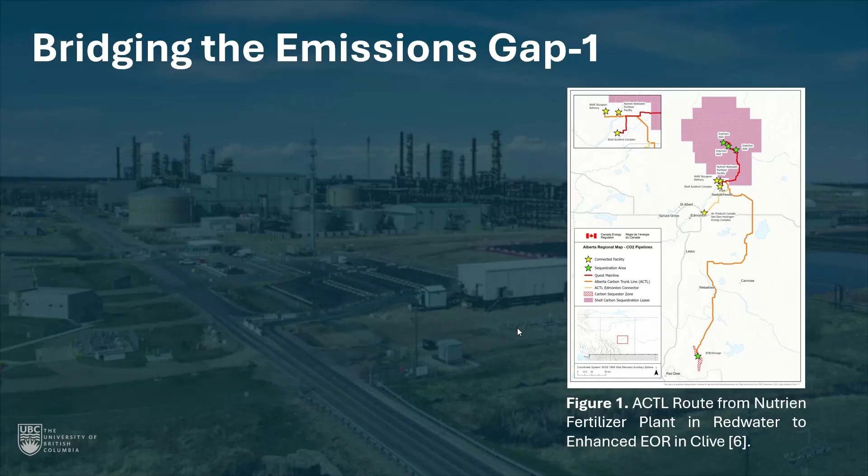Now, looking at the current landscape, we're not starting from scratch. In fact, Alberta is a global leader in this, starting with the Alberta Carbon Trunk Line, which is the world's largest CCS project, which basically captures CO2 from the Northwest Redwater Partnership Refinery and the Nutrien fertilizer plant in Redwater and transports that CO2 to mature injection wells in Clive.

This is a 240-kilometer pipeline transporting 14.6 megatons of CO2. This roughly translates to 2.6 million cars being taken away from the road. And so there's a huge offsetting capability of this plan. But the total project capital was $1.2 billion.

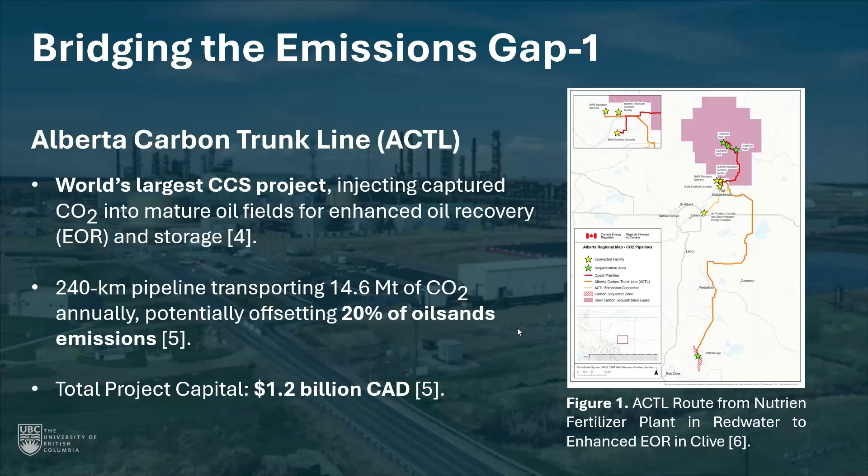Another major project underway is the Pathways Alliance project. This is a joint venture between Suncor, Cenovus, Canadian Natural, Imperial, MEG, and ConocoPhillips. Essentially, the project proposes a 400-kilometer main line with a capacity for 2030 of 10 to 12 megatons per year, eventually scaling it up to 40 megatons per year by 2050. So this would link 13 and eventually up to 20 facilities to underground injection sites.

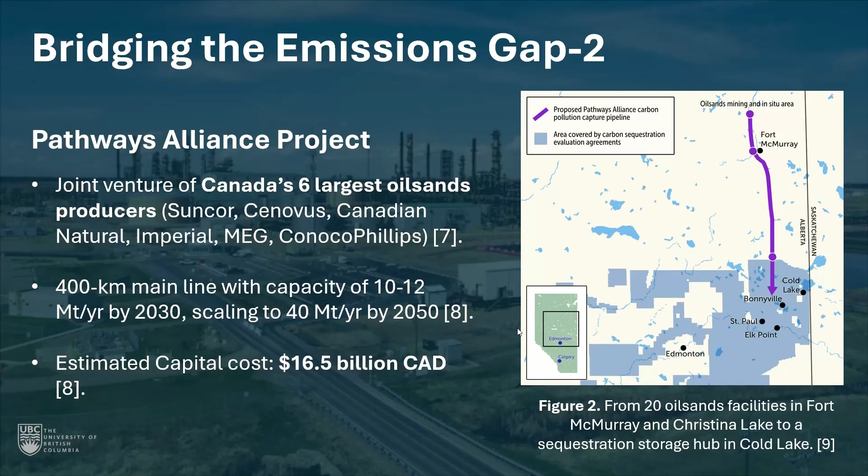And again, looking at the exorbitant capital cost of $16.5 billion. So as we can see, we are faced with an immense capital hurdle. And the question is, can we build our way to 2030 in time to meet our rising global emissions reduction plan? How can we achieve immediate decarbonization milestones while drastically lowering those capital barriers?

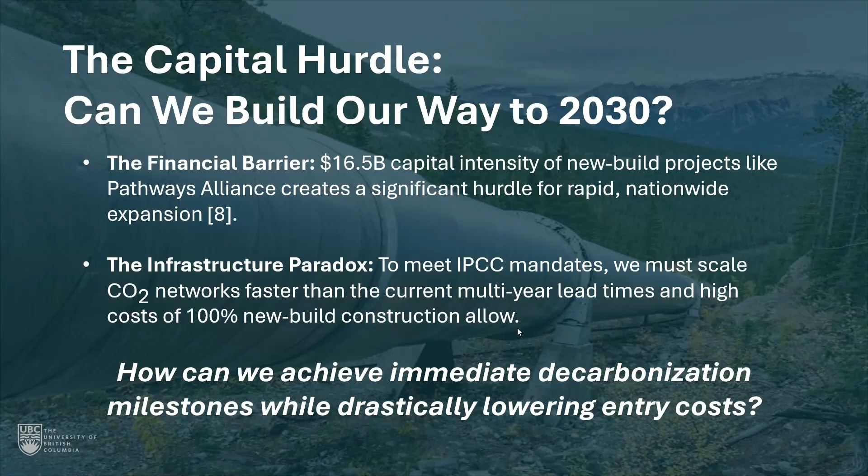So this brings me to the core part of the research, which is: is there a case for repurposing existing assets, oil and gas or natural gas pipelines, whether they're vintage or installed in the early 2000s, let's say.

So we do have examples of pipes that have been repurposed with significant cost reduction, starting with the West Glenville project in the US, which converted a 50-mile, 16-inch natural gas pipe. This pipe was originally installed between the 1950s and 1960s, for $5.2 million. So we see a significant $35 million reduction compared to new build estimates.

Secondly, there's the OCAP pipeline in the Netherlands, which repurposed a 51-mile oil pipeline. This was originally installed in the 1960s to deliver 3 megatons of CO2 annually.

And finally, the number 10 feeder in the UK. This pipe specifically was installed in the 1970s, and it's part of a larger project of a 174-mile conversion. So again, significant cost reduction, roughly half of a dedicated new line.

And as I was doing further digging, a study was conducted by DNV where they found that there's a significant capacity for repurposing pipe. Over 58,000 kilometers of European pipelines have been confirmed for these repurposing projects. And that is equated to 53 to 82% of a cost reduction.

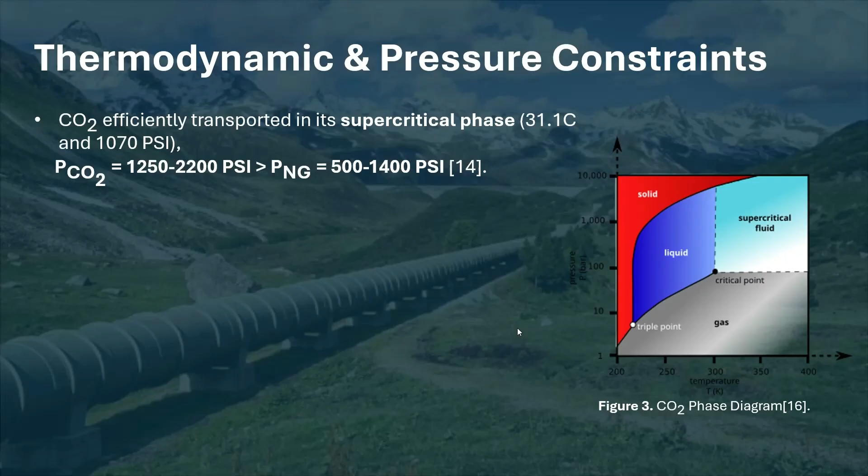And so this occurs at 31 degrees and around 1000 psi. And so the safe operating measure for supercritical CO2 is between 1250 and 2200 psi. Now we can see that's significantly larger than what many of these vintage pipes are rated for, which is around 500 to 1400 psi.

And so this can be quite significant in terms of some of the integrity threats to be seen: significant frictional losses from two-phase flow, lower throughput, as well as integrity issues such as rupture or cracking if specifically the internal pressure of the pipe exceeds the ultimate tensile strength of the steel. Then we start to see a lot of material-related issues.

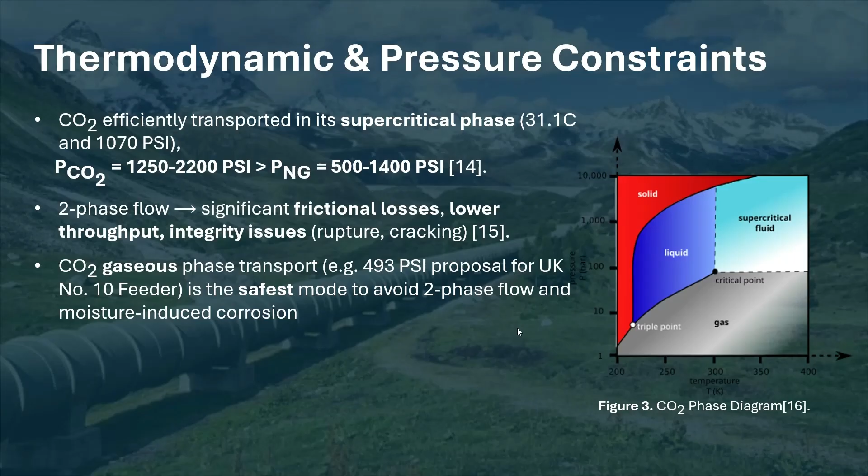From some of the examples I showed before, CO2 is generally transported in the gaseous phase, which is meant to be the safest route in order to avoid two-phase flow, where we can operate these lines within the design limit of these pipes and also avoid some of those integrity issues that I mentioned. So repurposing seems to be more plausible for short distance and modest quantity transport.

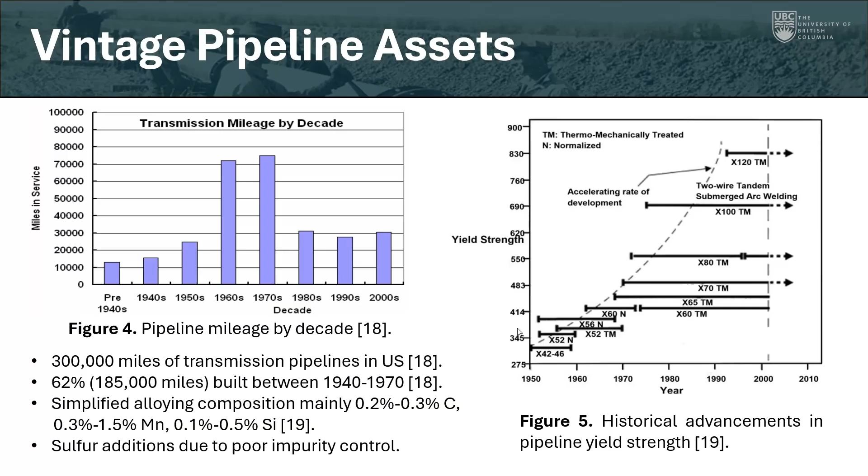While we looked at the thermodynamic constraints, we're also limited by the material constraints, specifically composition and manufacturing, where we see simplified chemical composition, so typically a higher carbon content, as well as low control over sulfur content. At that time, between the early 1950s, we wouldn't have seen as much control on desulfurization practices as we do see today.

Just commenting on some of the metallurgical concerns we have. One, of course, is as the pipe ages over time due to temperature and environmental fluctuations, we can see processes like solute diffusion, precipitation, or grain boundary decohesion. And this can express itself as precipitation in terms of carbides or manganese sulfide inclusion present, which can act as either stress concentrators or trap sites for hydrogen accumulation.

Also, as I mentioned, low control over impurities like sulfur and phosphorus, again from scrap variability at the time, contamination, and low tramp element removal. And as I mentioned just now, high sulfur content can result in manganese sulfide inclusion.

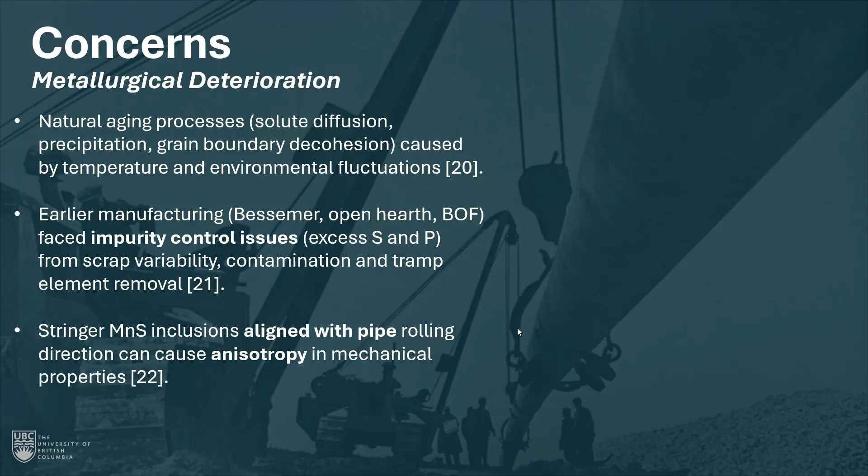These are essentially more ductile compared to the base steel. So during pipe rolling, these sulfide inclusions can align itself with the rolling direction. And then this can cause anisotropy in mechanical properties like tensile strength, ductility, and fracture toughness.

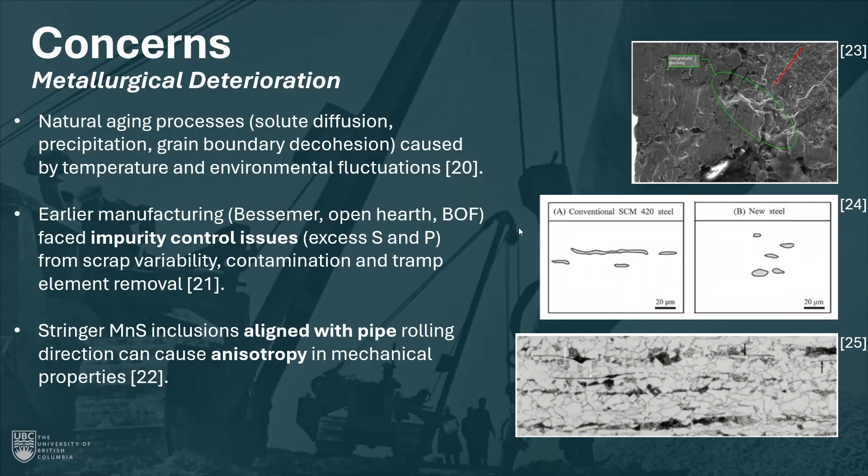So these are just some images showing specifically - the middle image, we can see the banded or elongated stringer sulfide inclusions compared to new steel where they add calcium, which helps essentially - I'm not too familiar with the process, but it essentially breaks up those sulfide inclusions into globular smaller size, which are then more dispersed within the lattice, within the steel lattice.

And today I also want to focus on a concern of hydrogen absorption, so leading to hydrogen embrittlement, cracking, or blistering issues. So when we're looking at repurposing vintage assets, we are also interested in the cumulative history - what has accumulated over the lifetime of that pipe.

And typically a lot of these lines were serviced for sour and sweet natural gas transport. What those two words refer to is the concentration level of hydrogen sulfide. And so if for whatever reason these lines had poor dehydration, we would see that hydrogen sulfide dissociates in a brine environment and forms sulfurous species as well as hydrogen protons.

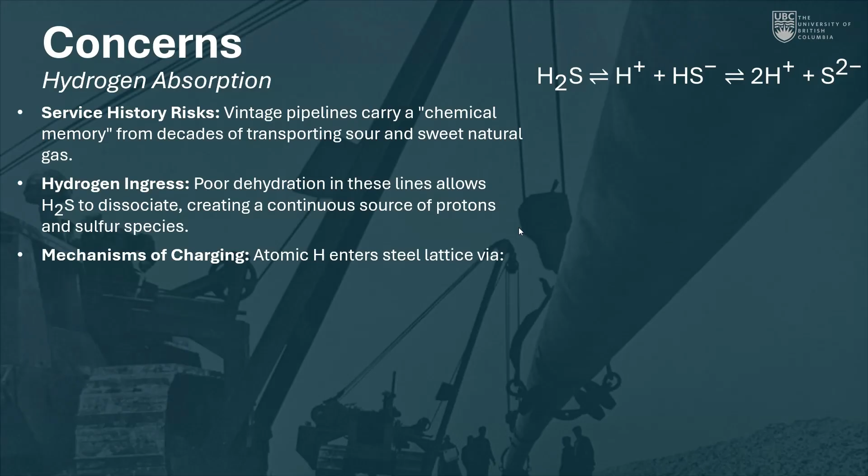And so the mechanism for how hydrogen absorbs into steel occurs from two areas. One is internal corrosion. So now let's say we have an aqueous environment within our pipe. We have our anodic oxidation reaction of steel oxidation.

And then to support that reaction for charge balance, we have the cathodic reaction of hydrogen evolution. So we can see that protons accept an electron to form hydrogen gas. And where do these protons come from? Well, as I mentioned, if we're having hydrogen sulfide dissociation, which also generates protons, then this becomes the source for the cathodic reaction, which then also drives corrosion within that pipe.

And then, of course, also cathodic protection is an issue. So, of course, if the intention is to protect our pipe, if we apply negative potential or negative current, if there's areas or pockets of moisture within that pipe, during cathodic protection, we're also essentially driving that cathodic reaction - we're driving hydrogen evolution. And so we might also see further generation of hydrogen atoms within the steel.

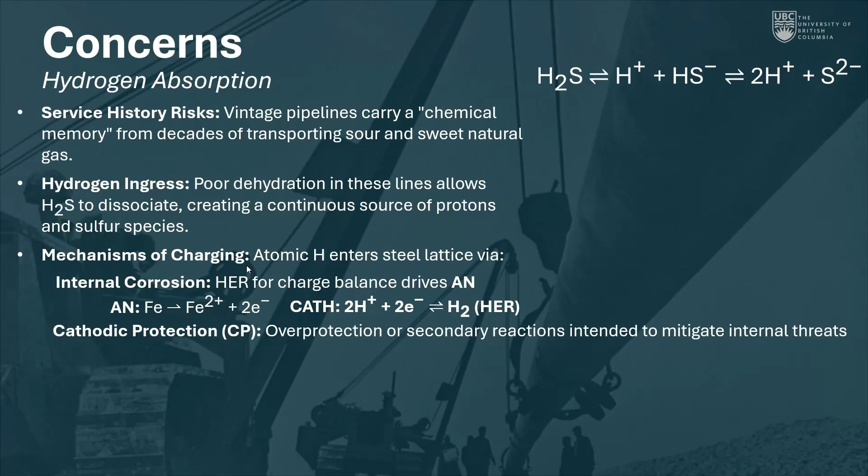And what does that look like? So essentially, if we look at the cathodic reaction, before hydrogen gas is formed, H2, we have single atomic hydrogen atoms - just single H's essentially being adsorbed on the steel surface. And when two of them combine, they form hydrogen gas.

But just before hydrogen gas is formed, those single H atoms can diffuse through the steel lattice. And specifically, they can accumulate at defects, which over time can build up its own partial pressure within that steel. And if that exceeds the steel's tensile strength, we may see blistering or hydrogen-induced cracking propagate within the steel.

And so I did want to just briefly mention that there are two trap sites where hydrogen can accumulate, those being reversible and irreversible traps. So reversible traps refer to fast diffusion pathways like grain boundaries, dislocations, or lattice vacancies, and they have a much lower trap binding energy compared to irreversible traps - where, if you think of a highway and you have cars and then there's a sudden crash on that highway, then you start to have a much slower flow of traffic. And that's exactly what irreversible traps are.

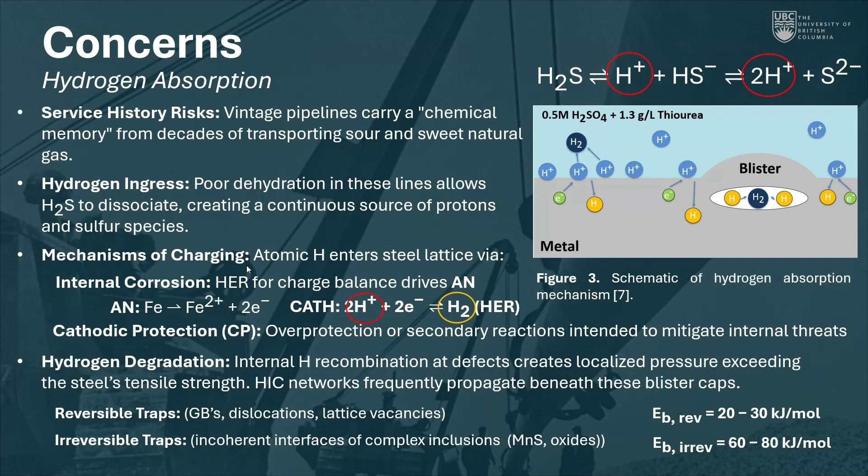They basically act as a sink for hydrogen accumulation within incoherent interfaces, and we typically see these around manganese sulfide inclusions as well as complex oxides. So again, as I alluded previously, manganese sulfide inclusions can be a deep trap site for hydrogen accumulation.

Now that I've looked at the market value of these aging assets as well as the metallurgical concerns, this brings me to my research, where I worked on a case study of a decommissioned 1950s natural gas pipeline. I have three objectives: one was first doing a metallurgical characterization, where we looked at the microstructure and mechanical properties of the vintage pipe compared to modern standards. Then we also looked at the effect of hydrogen absorption.

Let's say this pipe was exposed to a sour gas, and then we would want to see, based on the microstructure we previously assessed, how that hydrogen accumulates in those inclusion sites. Then when exposed to a new CO2 rich environment, during that transition from old to new environment, how does this hydrogen surface damage behave or accelerate corrosion of steel? Finally, I have some images on both pre and post corrosion blister attack.

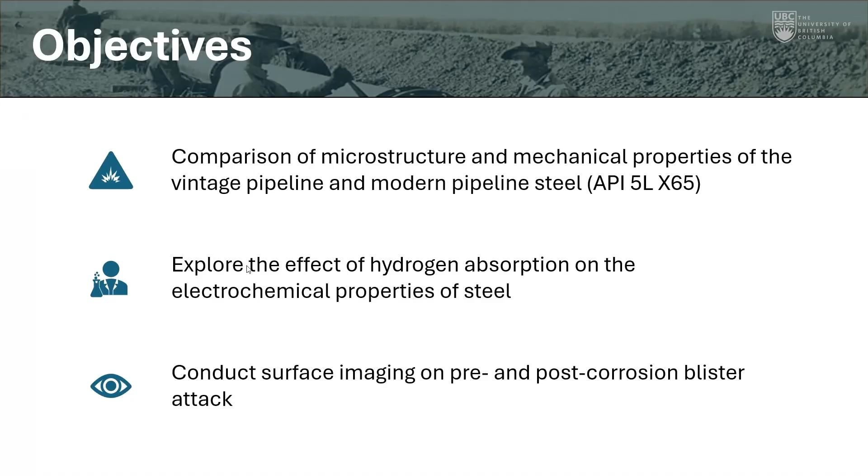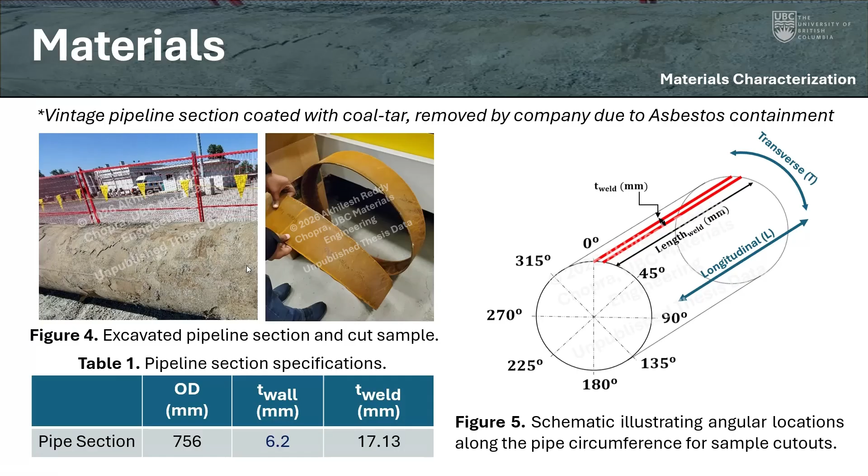So these were a few images of the pipe that we received from a company that I cannot name. We extracted tensile dog bone samples and coupons for the test from various locations along the circumference of the pipe, with 0 degrees referring to the weld line and 180 referring to furthest from the weld. We also extracted samples along the weld line as well as transverse to the weld line to assess any potential anisotropy.

I want to mention that when we first received the steel, we were operating in the dark. We didn't know the service history, we didn't know the chemical composition. So I had to perform something called spark optical emission spectroscopy, OES, where we can essentially obtain the chemical elements of both pipes.

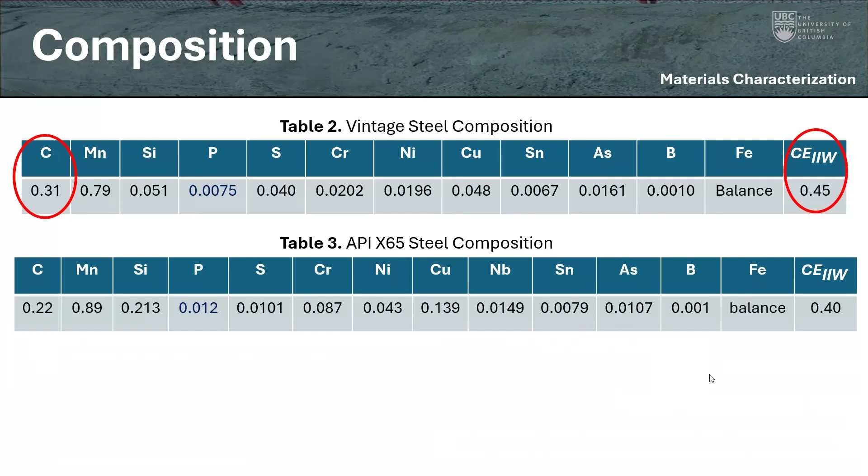I also want to comment on the high sulfur content. In the vintage steel, it's 0.04 compared to 0.01. This exceeds the typical maximum limit of 0.015 weight percent, seen in API 5L for X42 and X80 line pipe steels. This can also imply a dirty steel prone to a high density of manganese sulfide inclusions.

In this image, we can see the microstructure of both image A, the X65 steel, and image B, our vintage steel. Note in image A we see a relatively uniform distribution of polygonal ferrite, also with some areas showing pearlitic phases, bainite, as well as some needle-like or side-plate ferrite pearlite, also known as Widmanstätten ferrite. This can increase the strength of our steel, but it has to be well distributed, which we can kind of see from the morphology of image A.

Versus in image B, for the vintage steel, we do see both coarse and fine grains of ferrite. In the pearlitic depleted regions, we have a greater accumulation of coarse-grained ferrite, and in the pearlitic rich regions, basically the areas that show more black color and contrast, the ferrites are finer.

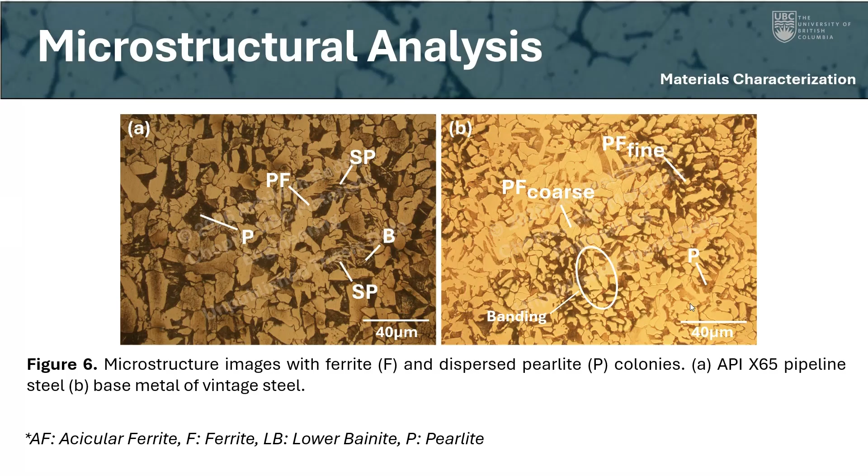So from these images, I tested the yield strength, failure strength, and percentage elongation of our steel dog bone samples for vintage and X65. On the x-axis, you'll notice the various locations along the circumference of the pipe, and then the data points. The red refers to transverse or perpendicular to the weld line, and the black data points refer to along the weld line, or parallel to the weld line.

So what we can clearly see right off the bat is anisotropy, right? Generally, we would want to have similar properties between both the longitudinal and transverse dog bones, but we can see from the yield strength that those are deviating in opposite directions. Also, the values are differentiated along the circumference of the pipe.

I specifically want to comment on the failure stress and percentage elongation. Under loading along the longitudinal direction parallel to the weld, we can see deformation proceeds along the orientation, like we can expect or hypothesize that deformation existed along the inclusion orientation. So if those inclusions, as I mentioned, were elongated and rolled in that same direction, then we would expect to see higher ductility versus transverse to the direction.

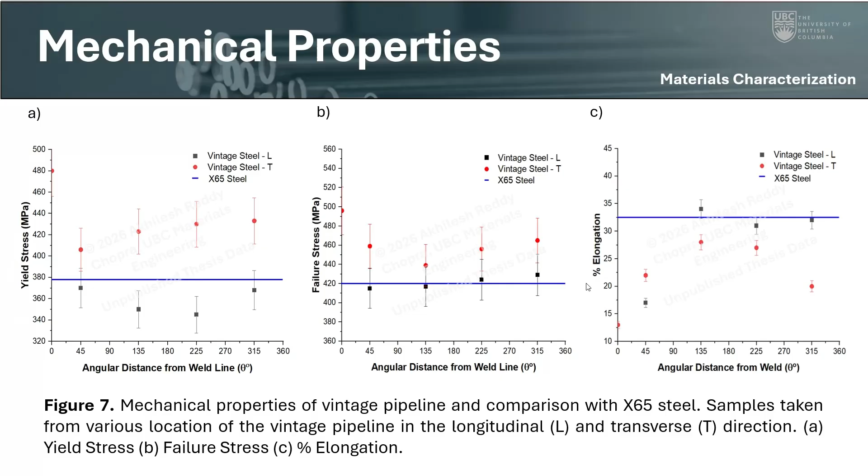So this is very interesting information. And I confirmed the presence of our sulfide inclusions from doing EDS analysis on the fractured surface. So in figure 9, we see a stringer inclusion, which kind of looks like a flattened pancake, let's say.

Area 1 and area 2 is a region of no sulfide inclusion. And from the spectrum, we can see area 1 does in fact have sulfur and a high degree of manganese, compared to spectrum 2, which is mainly just the iron manganese lattice.

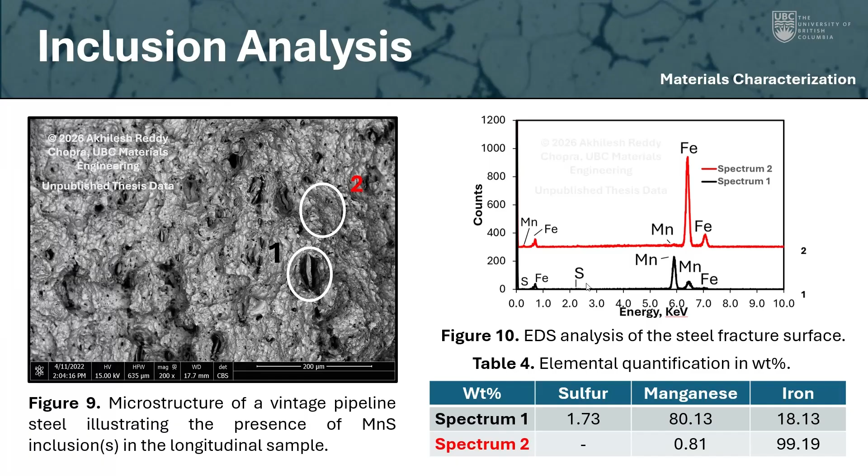And I also conducted EDS and EPMA on a variety of different inclusions that I detected. I want to specifically highlight the colored EDS image. Essentially, it shows a mango-shaped manganese sulfide inclusion characteristic of silicon-killed steels.

The architecture is a result of a two-step formation process. So the silicate caps formed first during deoxidation. They act as seeds for the manganese sulfide to nucleate onto as the steel solidifies.

So during hot rolling, the soft sulfide core was likely squeezed into the stringer shape, while the hard oxide caps resist deformation. Mechanically, these are critical failure points where we can see thermal expansion mismatch between the brittle oxide and the steel matrix, which creates stress concentrations that can trigger micro voids.

Furthermore, the sulfide core is chemically active, making these inclusions primary targets for pitting and hydrogen trapping.

In figure 12, again, we can see that stringer-like manganese sulfide, that black inclusion, is quite elongated versus the lighter region, that globular inclusion, which was actually a mixed oxide containing, I believe, aluminum, silicon, and oxygen. So again, just pointing to the morphology of various inclusions and oxides.

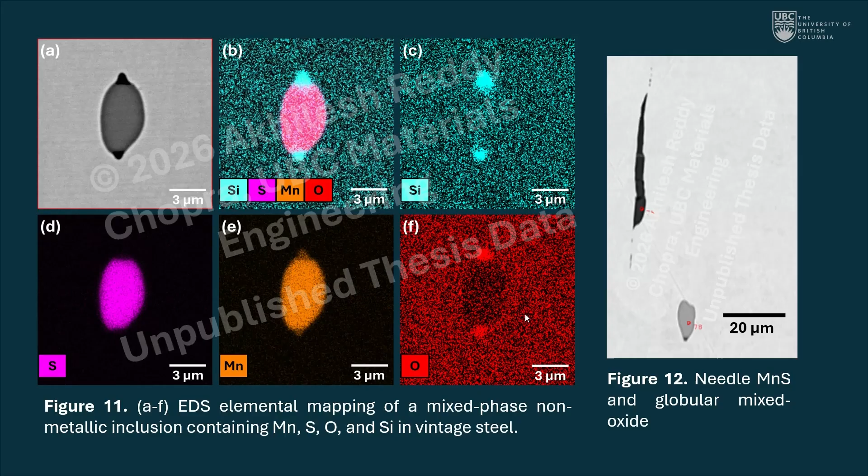And then the final step to our materials characterization is running hydrogen permeation tests. So we want to see, based on the microstructure, how susceptible the steel is to hydrogen penetration. This tells us the intensity of hydrogen trapping based on microstructure and inclusion.

This is just one of the corrosion or electrochemical techniques where we have our steel membrane in the center. On the left side, we're essentially generating hydrogen by applying a negative potential to drive the hydrogen evolution reaction. Once that hydrogen adsorbs onto the steel, it diffuses through the membrane, and when hydrogen exits the membrane, it's immediately oxidized, as we impose a positive potential. So this image just explains that setup.

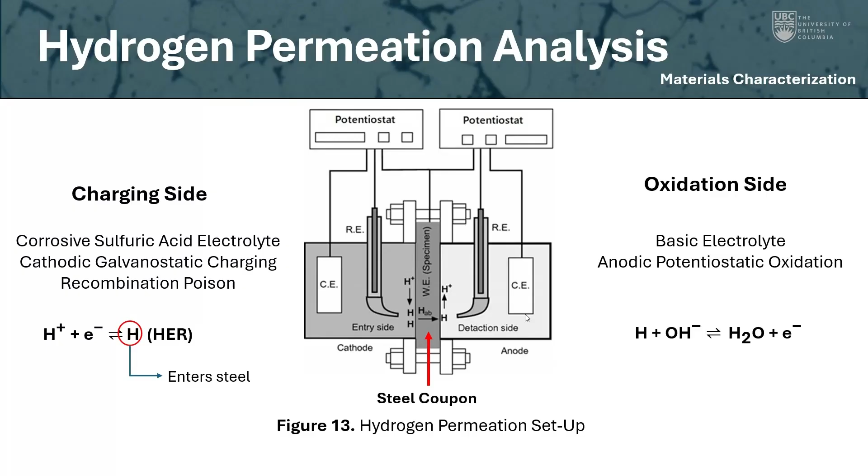And from these results, we obtain these permeation transients, and we see two very different integrity stories. This oxidation image essentially corresponds to, as soon as that hydrogen exits the steel, it's oxidized. So that oxidation current refers to exited hydrogen, right?

So from the vintage steel, we can surprisingly see a shorter incubation time. That's the black line. When I say incubation time, that's where we essentially have no current and then a sudden spike in current, that's when the first hydrogen exits the steel.

And so that has a surprisingly lower incubation time compared to the X65 steel. This suggests that the vintage steel has short circuits or fast diffusion pathways initially, allowing hydrogen to suddenly pass through that steel. That is, again, likely due to the morphology of having those elongated stringer inclusions, or also heavily banded ferrite pearlite in between, essentially those interfaces, hydrogen can pass through.

But as we see over time, over the next 70 hours for vintage steel, we see a continuous decay instead of a steady state plateau, which is observed in X65. This essentially tells us that these inclusions are continuously trapping hydrogen over time, slowing down the mobility of hydrogen through that steel, so we're not seeing an equilibrium develop over time.

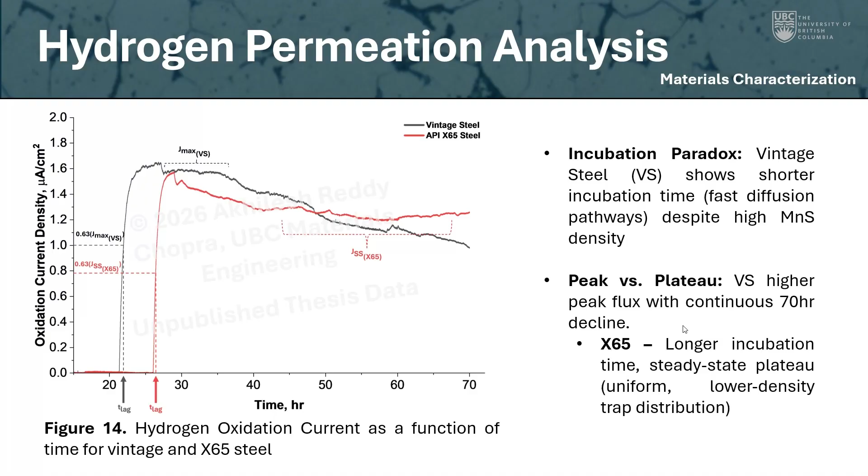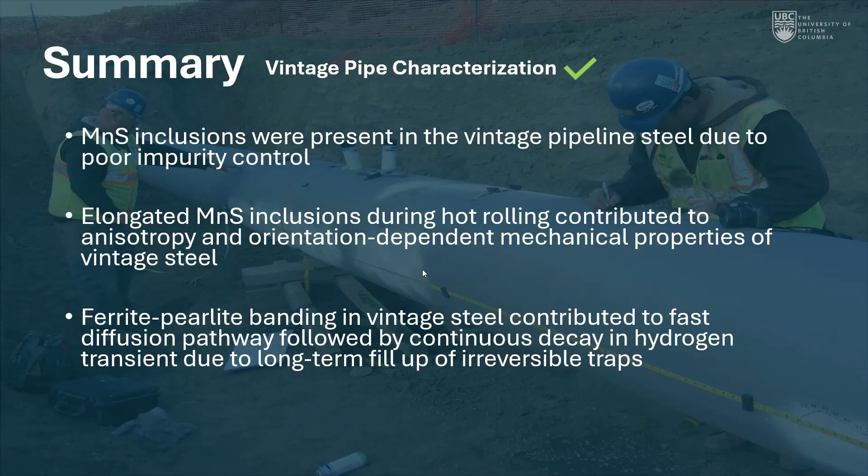So very quick summary: we've looked at the presence of inclusions and how it corresponds to anisotropic mechanical properties, as well as the hydrogen transients, where initially the morphology of inclusions as well as microstructure can contribute to fast diffusion pathways, but then over time can act as deep sinks for hydrogen accumulation.

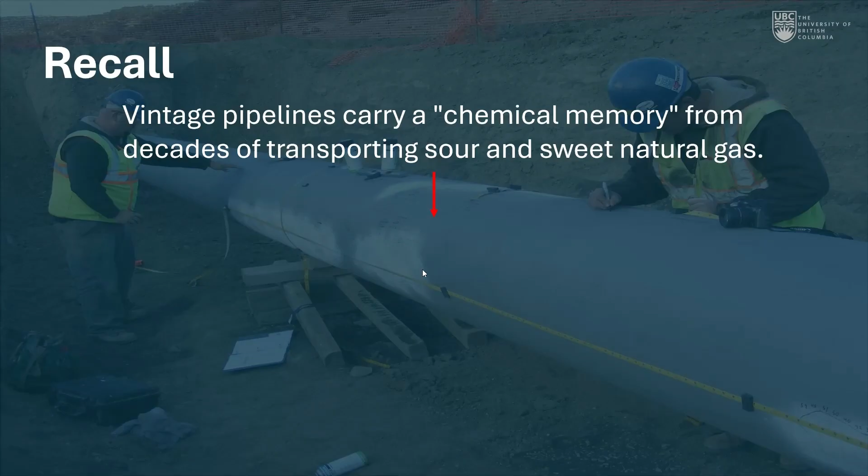So now I'll go very quickly because we might be losing some time. Now that we've looked at the metallurgical history of the pipe and understood the pipe, the next step is to see how it behaves in a new environment, in the CO2 environment.

So as I mentioned, if we recall from a previous slide, we need to look at the memory or history, the accumulated history of that pipe. And since a lot of these pipes were exposed to sour gas conditions, I wanted to simulate the worst case of hydrogen damage on my vintage steel.

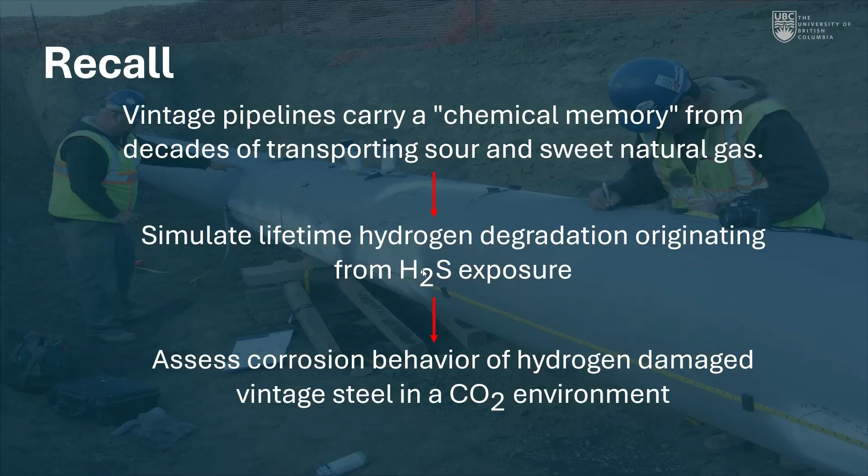Once I've simulated that hydrogen damage, I take these samples and expose them to a new CO2-rich environment where I look at the corrosion behavior. So my main goal was to see how hydrogen damage affects the corrosion properties in a new CO2-rich environment.

Initially, in order to simulate worst case hydrogen degradation, I didn't actually expose the steel to hydrogen sulfide. In research, we can accelerate our conditions. So what I did was apply a negative current and force hydrogen evolution reactions to take place by generating hydrogen on the surface of the steel.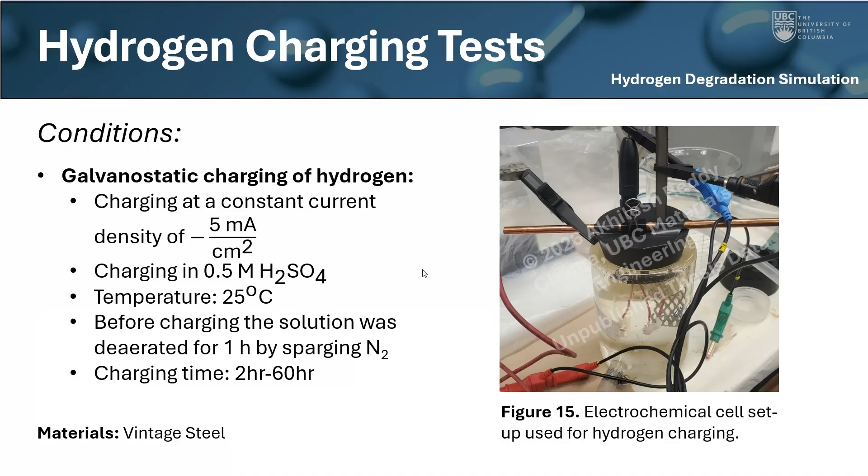I did this for various samples and changed the charging time. I charged the steel between 2 hours and 60 hours, which of course changes the concentration of hydrogen within the steel. And as we can see here, some interesting images.

In figure 16, A and B: A refers to an image charged for 2 hours versus 60 hours. We can see an incredible increase in both the size and the population density of these blisters. In figure 17, again, the first image corresponds to the 2-hour charging condition.

So we see essentially a lift in the steel matrix. As we progressively increase charging, not only do we have larger blisters, but also smaller blisters concentrating around the initially formed blister. And of course, under severe charging, that's when we start to see severe cracking.

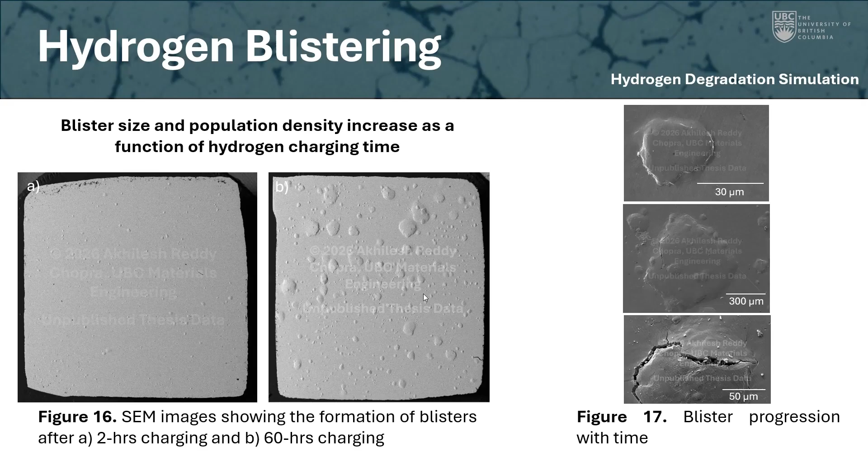For the electrochemical performance of the steel, as you can see in figure 18A, I conducted potentiodynamic polarization tests on all of my steel samples, with the control being this black line. The black data shows uncharged steel, at the 0-hour condition, and all of the colored lines below refer to the hydrogen charged steel between 2 and 60 hours.

What we can clearly see is that the corrosion rate does in fact increase, and significantly increases especially after charging to 36 hours and beyond. We can also see from our polarization data that the OCP, when we are not applying any potential, also decreases by around 50 millivolts.

So this essentially shows that corrosion does in fact increase. Now there may be two reasons for this. One, of course, is the increased surface area, right?

So at 60 hours, the actual surface area of the steel is no longer the same as an uncharged, clean surface. Now that we have blisters, we're increasing the surface area, and therefore the current we generate would also increase in magnitude. But I also, what I don't show here, performed EIS tests.

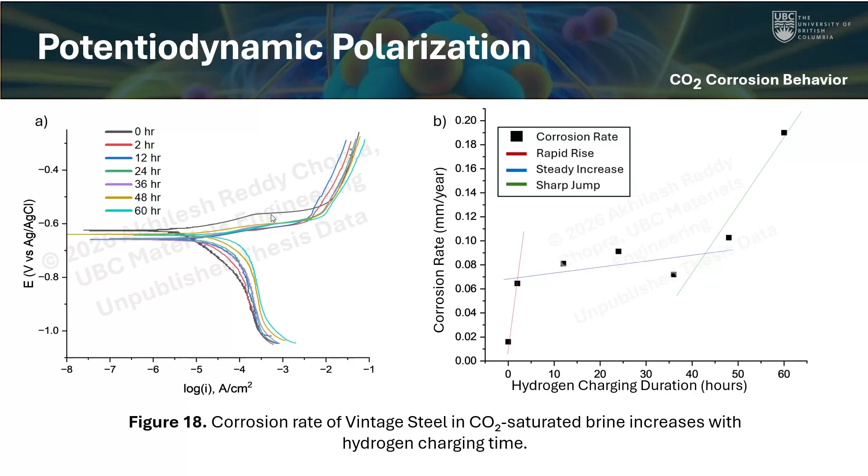And so that also tells me that it's not just a surface phenomenon, but the hydrogen itself—if hydrogen atoms are within the steel, the iron lattice, those areas become highly strained regions where, compared to the base lattice, because of that highly strained area, steel may be more willing to give up an electron and oxidize.

I also performed SEM images on post-corroded samples, the blistered samples immersed in the CO2-rich media. And what is very interesting is we see localized attack.

In all three images, essentially the same location, these were all exposed to our electrolyte. The clean steel without any blisters doesn't really show localized attack, which is expressed through the contrast in color, compared to these blistered regions. If we look at figure B, which corresponds to the backscatter SEM images, it shows a defined etched microstructure.

We've been able to etch the surface with our corrosive electrolyte and reveal the underlying microstructure. This also tells me that if these regions are under high strain and more willing to oxidize, we can see that expressed through these images compared to the base steel.

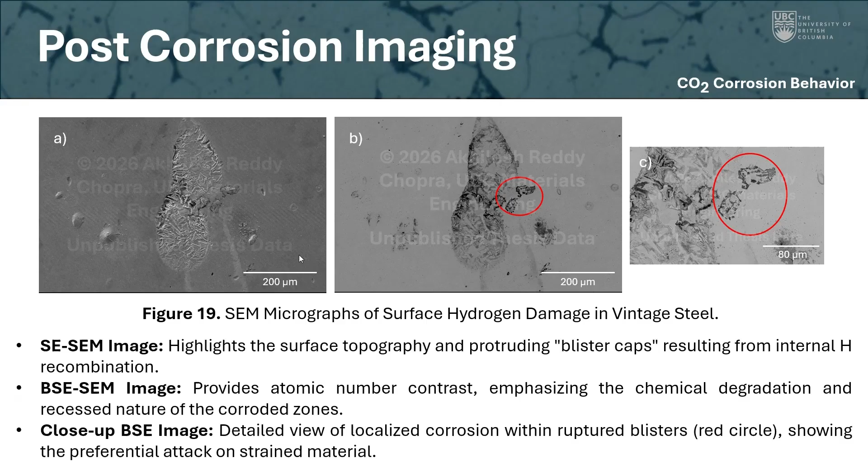In figure C, those two areas were blisters—distinct blisters that formed. We can see around the periphery, around the perimeter, as well as on the blister cap, both have been attacked locally. This is quite interesting for me to see how hydrogen can in fact accelerate corrosion in steel.

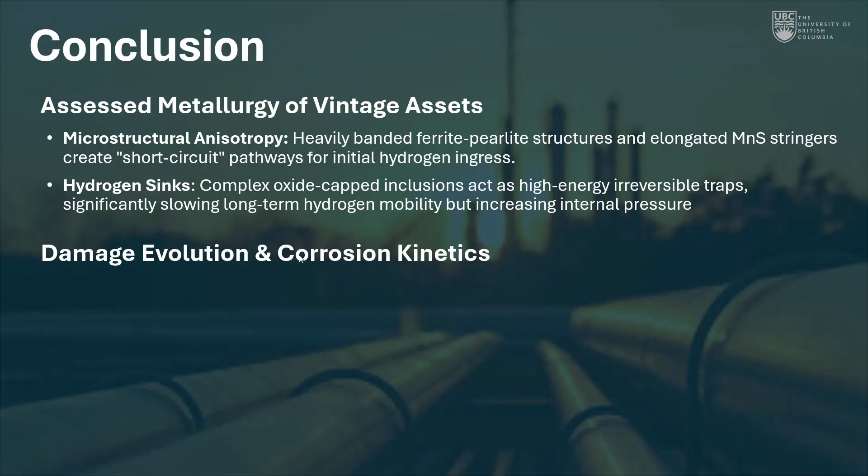Essentially for our conclusion, we've assessed the metallurgy of the vintage assets. We also looked at the corrosion kinetics and how blistering can potentially accelerate corrosion in steel. Basically, we have to see that there's always going to be a trade-off between the engineering and our financial incentives that drive industry. So I have a few key points on requirements for successful CO2 deployment.

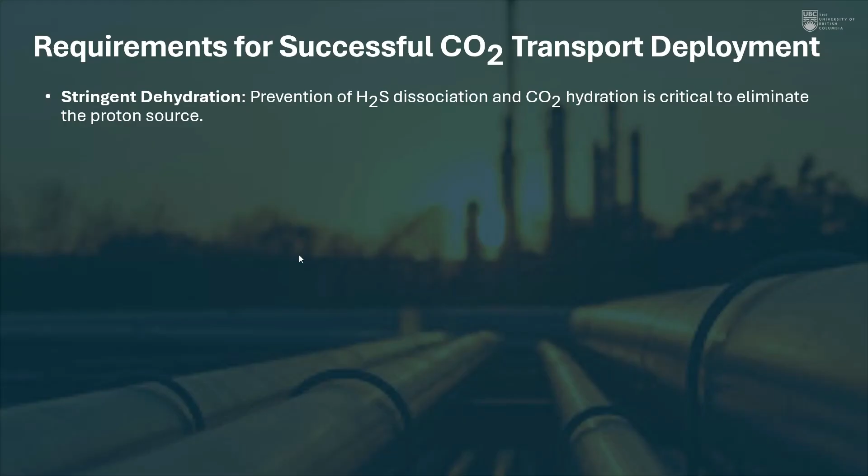If we are to use vintage assets, we have to ensure stringent dehydration—this applies essentially to all pipes. As soon as you have hydration, you have corrosion risk. But specifically we need to look at inclusion mapping, because depending on the environment, whether it's CO2 or other types, the steel essentially acts as our blueprint, and it can tell us—we can forecast what kind of issues can occur.

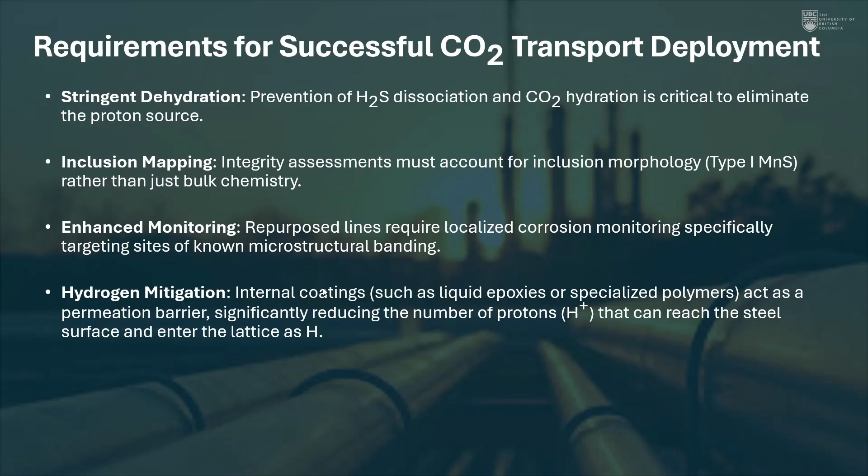So we need more monitoring, and we also need hydrogen barrier coatings. What I found was a lot of carbon steels in the CO2 industry in fact have no internal coatings—they're bare steel. This is the biggest issue, because if we want to prevent any hydrogen attack, we need a layer of coating to prevent that hydrogen diffusion through steel. So this concludes the research I've done thus far. These are my references, and I hope it was informative enough to learn something new.

It was amazing. I always joke, what would a materials engineer presentation be without microstructure pictures? You can't, right? It's integral. How can I explain that—a microstructure? So really cool. I loved it. You transported me back 25 years or more, to when I was like you in university doing those studies.

I have one question: is all of this done from samples from an actual pipe that you got the opportunity to cut? Sometimes I die for those opportunities and they're rare in the industry—they're like, no, let's just plug the tube, and then we need the equipment, and they're like, oh my God, okay. So can something like this be done without the actual sample, or what kind of information would we need from the asset being operated? Maybe not to the point you've gotten to, because obviously nothing replaces a piece of microstructure you can put under the microscope, but something similar—could it be done without destructive testing?